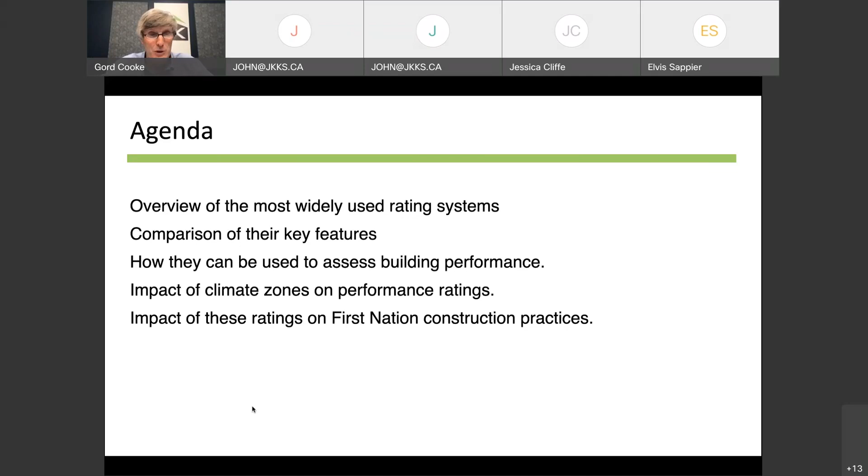For this particular talk, I was asked to speak about - and I'll give you the agenda over the next hour - an overview of the most widely used energy rating systems and energy modeling systems, a comparison of some of their key features, and then how they can be used to assess building performance. I thought I'd give you a sense of what they look like in different climate zones - some extremes, frankly, coast to coast to coast, and you'll see what that looks like. And lastly, throughout, think about what the impact would be on First Nations construction practices, I guess is where we'd start.

I showed this slide last week in terms of Passive House, but in Canada there are roughly these energy programs, at least on the residential side - it would be different for community buildings, schools, and so on. On the residential side, these are the various energy programs out there across the country. Some of them are province specific - the bottom right corner, for example, Novoclimat is a Quebec-based program. Built Green is primarily in Alberta and BC. The Energy Star program is available across Canada - it's a Natural Resources Canada program, but it's primarily been successful in Ontario and so on.

The one in the bottom middle, HERS Index - Home Energy Rating System - is actually a US program. It is delivered in Canada by one small provider, but generally speaking it's US-based. So those are the various energy programs. I thought I'd go back to the idea, and I know not all communities are using National Building Code, but just notionally understanding that in the National Building Code, from the energy perspective, which is Section 9.36 of the code, there are a number of compliance paths available.

You can meet performance requirements using what's called the prescriptive path. It's a series of tables by climate zones with some very limited choices and some ideas of trade-offs.

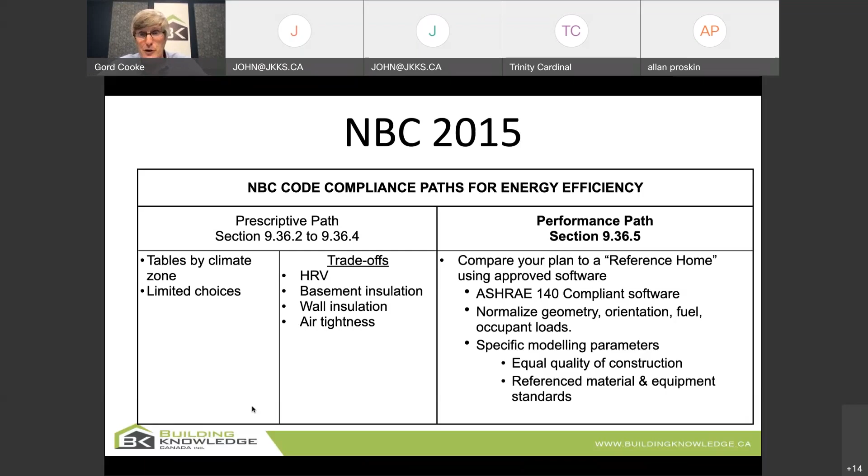Under performance path, you can dial in much better the energy performance of houses and get a better sense of where things are headed. Hopefully I can show you that as we go through this.

In order to do the energy modeling, you have to use a compliant software. There's a test that's done on the software, and right now there are three software packages available for energy modeling. One is HOT 2000, which is a Canadian government software.

Another is Energy Plus, which comes out of the United States historically, and then the Passive House program, which comes out of Germany. So there are three compliant softwares. You can use any one of those to model your buildings. Energy Plus is actually used on the commercial side as well, but you would model the house using that compliant software.

I'll go a little bit further. In terms of energy modeling software, they all give very similar comparative results. They use essentially the same basic algorithms but apply them in different ways, and those algorithms are what's critical. There are three categories of software.

First, on the left-hand side is HOT 2000, developed back in 1982 or earlier. It's owned and directed by the Canadian government. It's free. You have to be licensed in most locations, but not necessarily, as long as you have credibility. To learn the software is probably three days of reasonably good training to understand what it's about. You can fiddle with it on your own, but you'd probably want to take a training program.

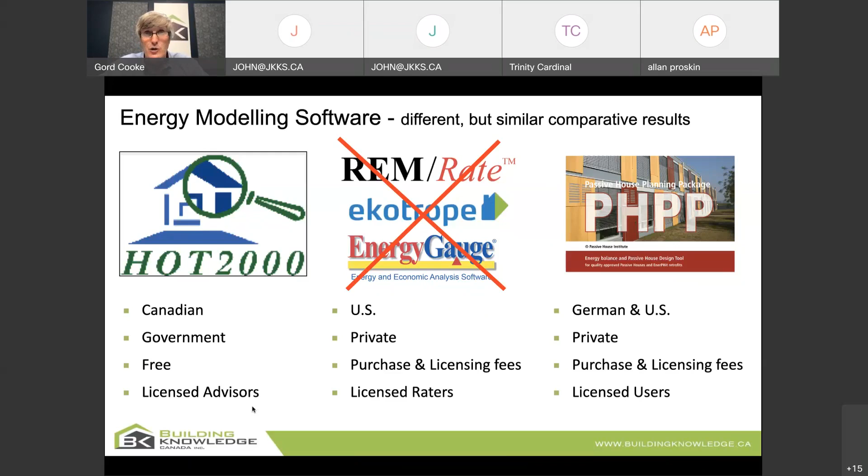So I'd encourage you all to get a familiarity, or get a relationship with, an energy advisor. There's about 700 licensed across the country. If you'd like to become one, they're encouraging that, and there will be training available shortly. At the very least, there's an association called CACEA, Canadian Association of Consulting Energy Advisors - I happen to be a member - if you're interested in learning more and getting training to be an energy advisor. So either become one or have a relationship with one so you can start to make use of these tools called energy modeling software.

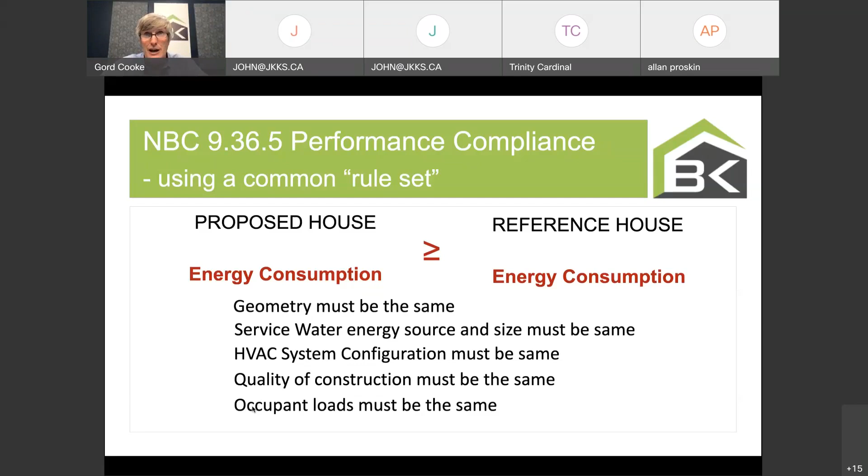There we have it. In terms of the comparative mode of National Building Code, I just thought I'd give you a sense. With the reference house and the proposed house, you basically take a house with the same geometry, the same service water heating source and size, the same HVAC configuration, similar quality of construction other than amounts of insulation, and you assume the same occupant loads. If there's going to be 6 people in your proposed house, there'd be 6 people in the reference house. You do an energy model, and as long as you can show your energy consumption is less than the reference house, then you're good to go.

The reference house is insulated to what's called the prescriptive levels of the code, the windows as per the prescriptive levels, the HVAC system as prescriptive, and then you insulate the way you want to, do windows to your specs and so on. It's worth a look because the style of housing you're building typically will model quite nicely under the comparative path or the performance path. So we always recommend all of our builders use the performance path because by nature, the prescriptive path is ultra conservative.

You're going to ask, how much does it cost to get a house modeled? If you send us a set of plans, if it's a one-off, we look at the size of the house and the complexity of the house, and it's typically $250 to $500 per house. Now, if you're building the same house time and time again, you don't have to model them every time - you model them once. And if you send in a whole whack of plans and say, I want you to do 20, and they're all very similar, then the cost will go down.

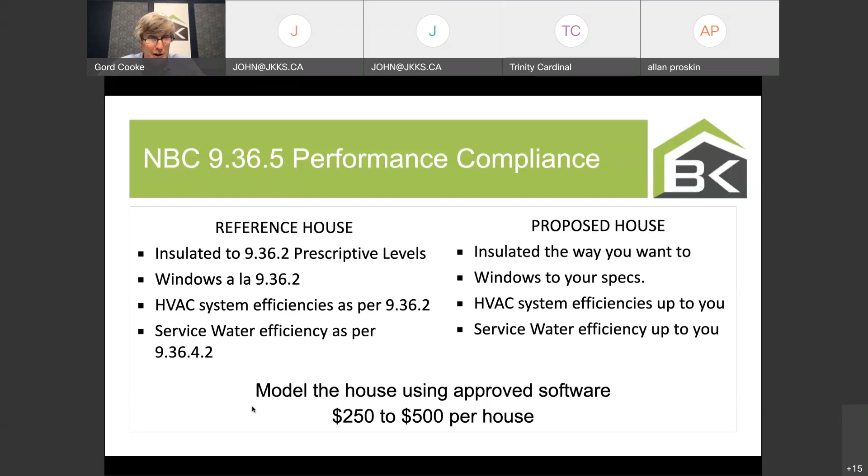But to have an energy model done on a set of plans, it's 3 to 4 hours of work, I would say, for somebody to do. Plus there's liability associated with it, reports to write and so on. So they're typically charging in that $250 to $500 range. And then I would say to you, that's energy modeling software. Now we get to rating systems.

If you wanted to compare one house versus the next, your house versus a house built last year, or your house versus the house being built across the street, there are two common rating systems. The first, on the left, is the EnerGuide rating system, developed in 2003 by the federal government for houses. You've all seen EnerGuide ratings on appliances, and now there's an EnerGuide rating for houses. On the right is the energy HERS index used in the United States. It's the most commonly used energy rating program in the US. There are others, but this one's commonly used. It's an index, and let me show you the differences as we go through this.

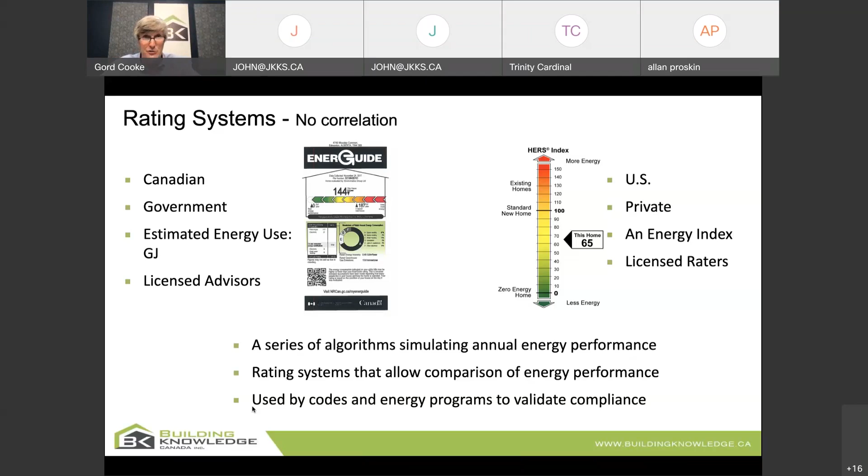Both of these use very similar algorithms that simulate energy performance, and they have rating systems that allow comparison of energy performance. On the left, EnerGuide, the lower the number, the better. It's actually in gigajoules, telling you the number of gigajoules of energy your house is predicted to use. The one on the right is an index. Again, the lower the number the better, but it doesn't tell you actual energy use. It tells you a comparative index of how well your house is doing. Both rating systems are recognized by code. This software rating system is recognized in the National Building Code of Canada. The HERS index is recognized in the International Energy Codes in the United States.

I thought I'd start with the HERS rating, just so we have a sense. As I said, simulation software creates a rating, and there are lots of software programs out there. This package is recognized in the Ontario Building Code, so it could be used, though not yet compliant with the National Building Code. Builders offer upgrades that improve performance. The rating system includes blower door testing, duct leakage testing, and drywall inspection. In Canada, there's an organization delivering the rating system. They're centered in Toronto, a fairly narrow scope I'd say for a great company, but they don't travel across the country. They would be happy to talk to somebody if they want to do it.

The key to the HERS index is understanding this: it's an index, comparing a house to itself. The scale is based on 0 meaning zero purchased energy, and 100 meaning a house built to the 2006 International Energy Conservation Code of the US. This means a 10,000 square foot house could achieve a HERS score of 65, and a 1,000 square foot house could also achieve a HERS score of 65. It's an index, basically saying that 10,000 square foot house at HERS 65 is 35% better than the same house built in 2006. It's showing you, relatively speaking, how well you did. If you took a house at 65 down to 35, you'd say you cut the energy use of that house in half. It's an index, so it doesn't tell you actual energy use. Hopefully that's clear enough.

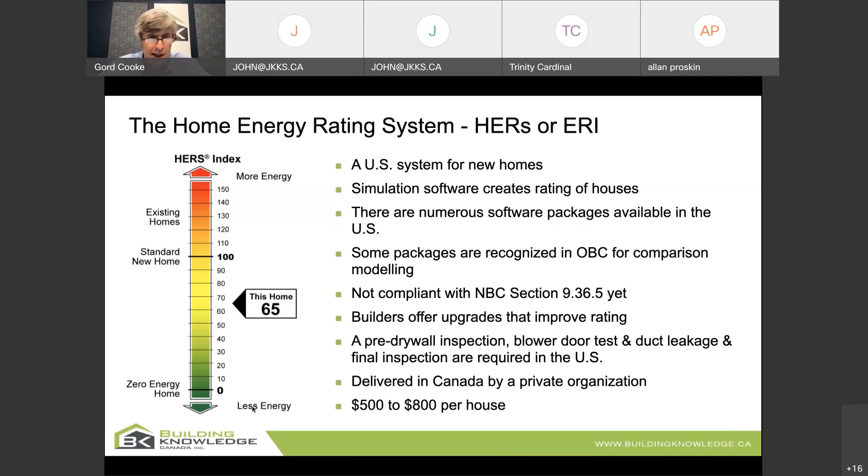They find it useful in the US because they don't want big houses necessarily compared to small houses. They like that everybody can show, hey, in a 10,000 square foot house, I made some nice gains, cut my energy use in half, even though I know I still use way more energy than a smaller house. But that's the way that system works.

The cost to run this is in the $400 to $800 range, a lot of that having to do with site visits. In northern communities, what's the capacity? Clearly somebody from my market isn't necessarily going to travel up to northern Ontario. So the cost really comes down to whether there's somebody local who can do that blower door testing. Let's imagine the energy model only costs $250.

To get an actual rating is $400 to $800. A simulated model can be done from anywhere - I can do a set of plans for China, for heaven's sakes, from my office. But to actually do a rating, I have to go to the house and test and make sure that things were done correctly.

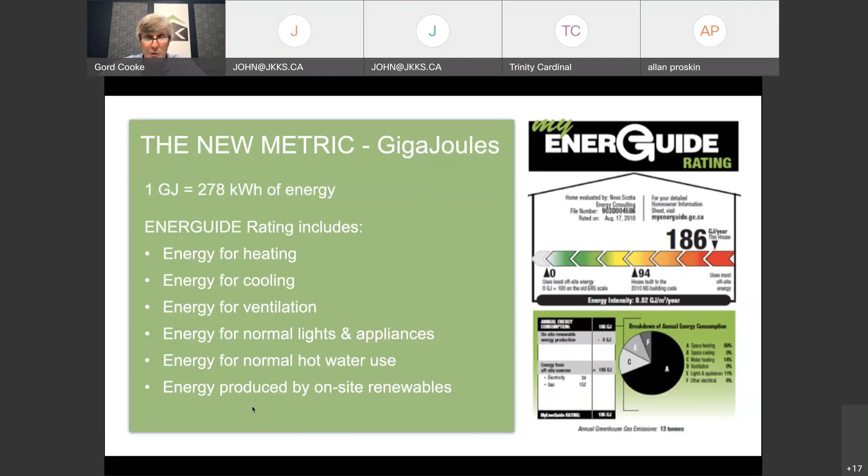In the software, you can change and model based on higher or lower occupancy. But when you're doing the rating, you always assume what are called default base loads. So I'll give you a sense of what that is.

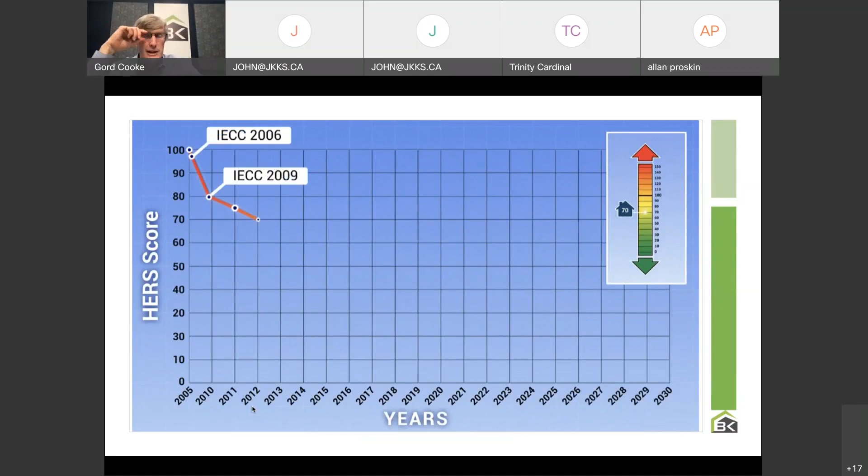I thought I'd go back to the HERS score - there's a little animation that plays here. This is the US HERS rating, benchmarked at 2006 code. The US program is trying to drive everybody to zero energy by 2030, and basically their codes have shown a nice progression of roughly 15% improvement every 3 years in the International Energy Conservation Code.

In the HERS index, by the time you get to roughly HERS 40 to 45, that's what we would call zero energy ready. That is, no amount of insulation, no matter how many panes of glass you've got - by the time you get to HERS 40, the only thing left to do is either take shorter showers, turn off the TV, or generate with electricity. So on the HERS index, HERS 40 is about as low as you can go.

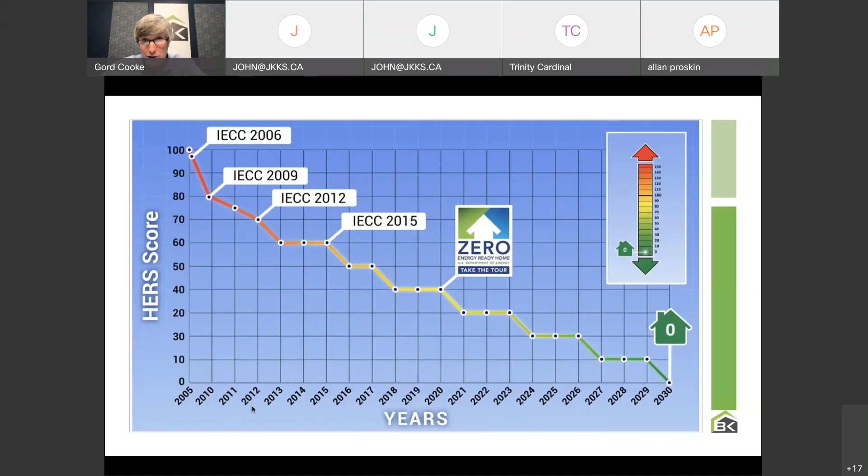I'm lying a little bit - I built a house that got down to HERS 31 without putting on solar, because I put in extreme amounts of insulation. But from a practicality standpoint, by the time you get to HERS 40, you're really stuck, and you end up putting solar panels on the house to get it down to zero. Why? Because the HERS index includes lights, appliances, hot water, in which case it's hard to make those more efficient.

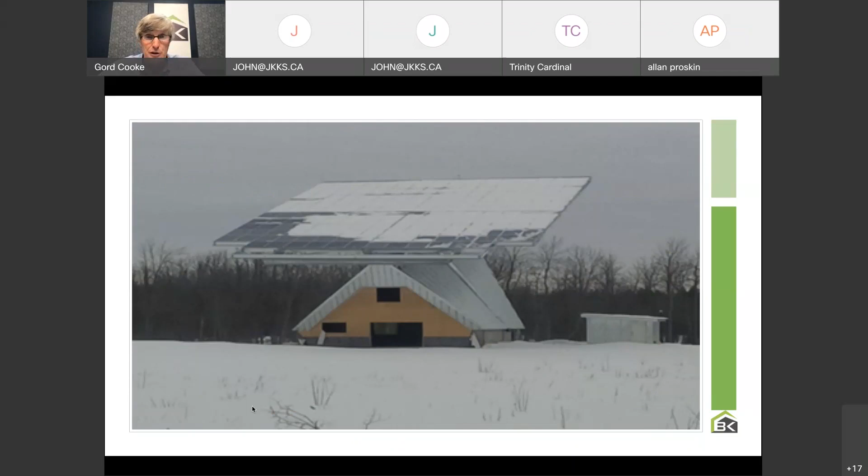So I just want to give you a sense of that - we always joke that that's what a zero energy house looks like. That's, of course, not what we'd like to see you build. We'd like to see you build better enclosures, especially in northern climates, because obviously we're not generating much electricity here when it's full of snow and dark. But I thought I'd give you a little sense of how an energy model is done.

So there's a set of plans for a house - this is actually an RTM, so you'll notice the dimensions so that it's easier to move. When you do an energy model, an energy advisor like myself simply takes the sets of plans and clicks through the computer to get the ceiling areas, the wall areas, the window areas, the foundation areas.

We put in the insulation levels, we put in the mechanical specs. And you can imagine on a computer, I'm entering this - I'll show you what the screens look like in a second. It takes about an hour, hour and a half to do the energy model for this kind of house, plus then there's some fiddling around in terms of reporting.

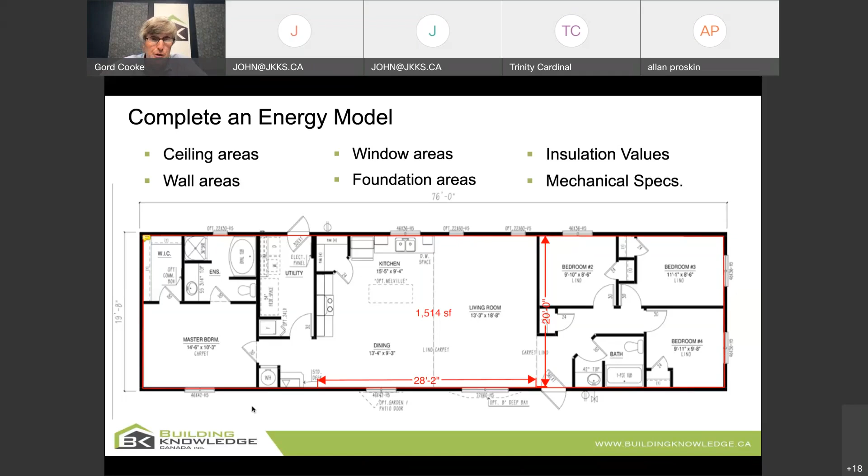That's why I said it's 2 to 3 hours worth of work to get that done. And we use the program called HOT2000, in this case, Hot 2000.

You'll notice on the left-hand side, you're basically building the house on the screen. You put in the ceiling levels, the wall areas, the crawl space, and so on. And you'll also notice a bunch of defaults.

What temperature is the house at? What's the base loads in terms of number of appliances? Is there any generation? Then you put in things like what you're expecting the air tightness to be, what ventilation system you use, what heating cooling system you're using, what hot water, and so on.

On the right-hand side, there's a whole bunch of screens that allow you to choose where you're located, what weather file you want to use, what fuel you want to use, whether you're in imperial or metric, and so on. In this context, the most important is the climate zone.

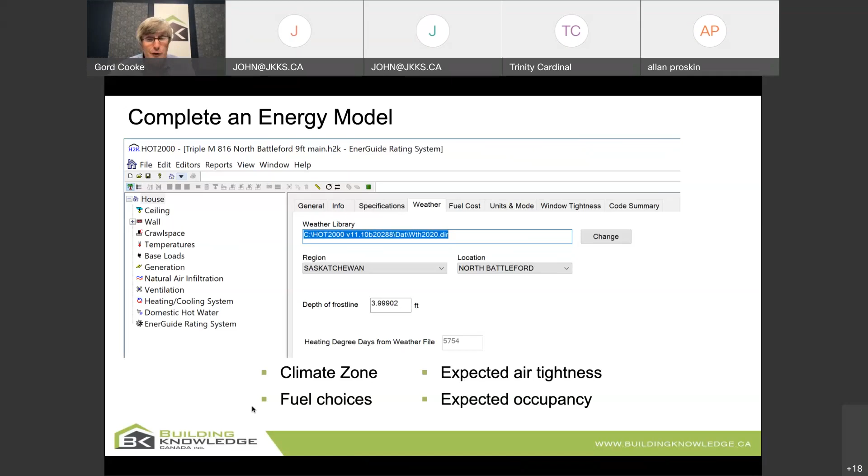Because obviously the climate has a big difference as to the performance of the house. But things like fuel choice, expected air tightness, expected occupancy, and so on - so you do that energy model for that house.

So that means there's tremendous flexibility depending on your community's preferred methods of build - lots of flexibility to model that. That's why I'm saying to you, performance path using these energy models, you'll find very useful.

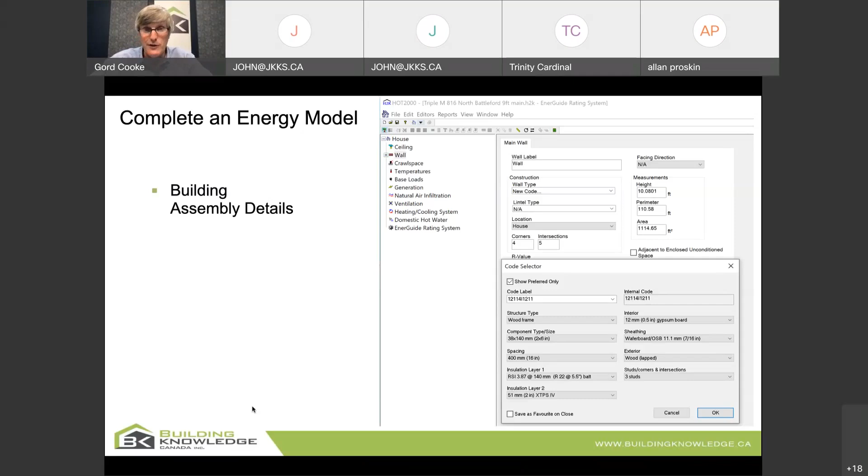Let's say you're using insulated concrete forms, or you're using SIP panels, or perhaps you're bringing in panels from somewhere else to erect, or perhaps you have a local source of an insulation product that you might want to use. You have the flexibility to enter that into this model.

So this is the energy model that's done. And then once you've done the energy model, it spits out a report. What we talk about doing is optimizing the options. This is our company, Building Knowledge, and we do this optimization report.

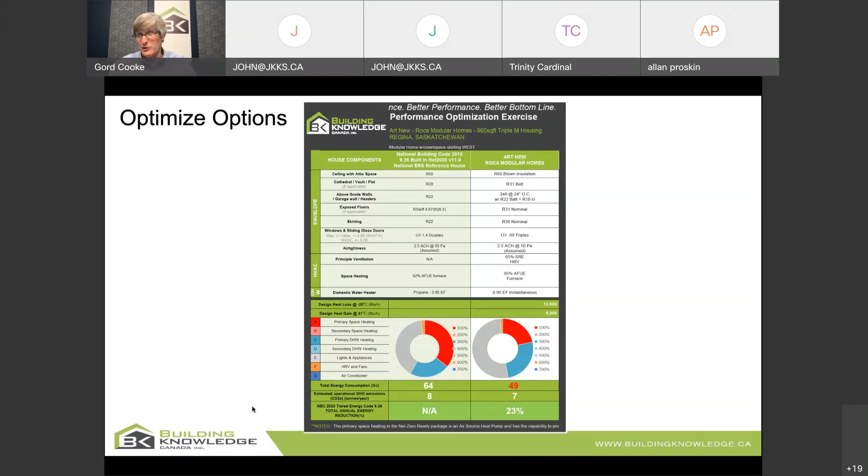In Hot 2000, you can put in the cost of fuel. If you're paying $1.50 a liter for propane, we can put that in. If you're paying 30 cents a kilowatt hour for diesel generated electricity, you can put that in for any number of places. That's exactly what this builder does—he's shipping it up to whatever community, he'll ask them their energy prices, and he'll ask us to put those energy prices into the energy model. Remember, it's not perfect. It may not match exactly what the energy use would be in that community, but it gives a comparative sense of the reduction in expected energy use.

So I took that house and modeled it for various locations. I went way out to the West Coast and picked Herbert Island, just off the northern tip of Vancouver Island. I also went to Battleford, Saskatchewan, Pond Inlet in Nunavut, Saugeen Shores where my cottage happens to be in Ontario, and Bathurst, New Brunswick, where my wife was from. I had a connection to each of those, so I thought I would put those in.

Remember, normal hot water use—we don't know how much energy people are going to use, so we assume 4 people showering and cleaning on a normal basis. It turns out that with this house the builder suggested, there's very little energy used in Herbert Island to heat the house, yet in Pond Inlet, still lots of energy is used. But you'll notice that in all cases except Nunavut, the hot water use is now bigger than the heating use. When you get to more and more efficient buildings, the impact of hot water is actually bigger than the impact of space heating loads.

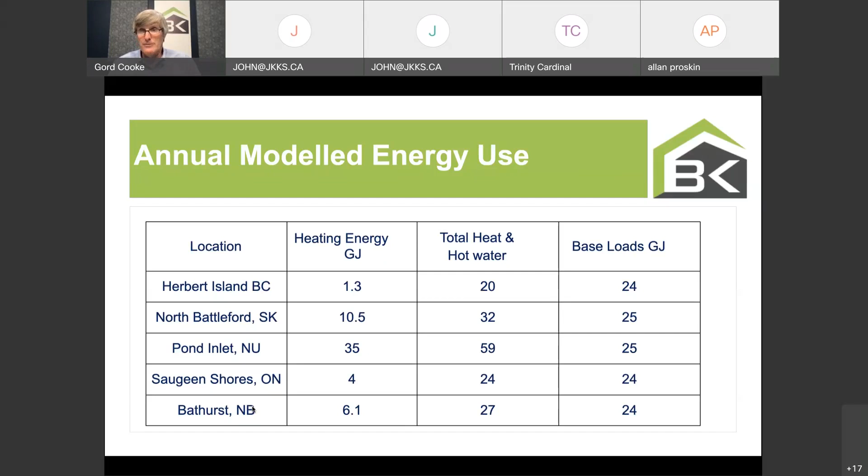So hopefully that's helping a little bit. Unless there are questions, I'll keep going.

These labeling programs would say, I want you to do the energy rating, and then I'm going to tell you what I want the number to be. So for example, in the R2000 program, you have to show half the amount of energy use as a standard code-built house. So if a code-built house is 100 gigajoules, you have to show up at 50 gigajoules. There's an actual pass-fail to these programs that you want to get to. The net zero program requires you to show that you are at 0 gigajoules in order to get there.

All of these programs have very specific registration and validation procedures. Every one of them includes at least one site visit to make sure that whatever was built met these requirements, tested performance. So the question always becomes, what's the value in these labels? I would say it's a quality assurance process - it gets you actual quality assurance. I have homeowners who would say to me, how do I know they're a good builder? Make them build Energy Star, make them build R2000. Therefore you know that somebody separate is coming to have a look at the energy performance of the building.

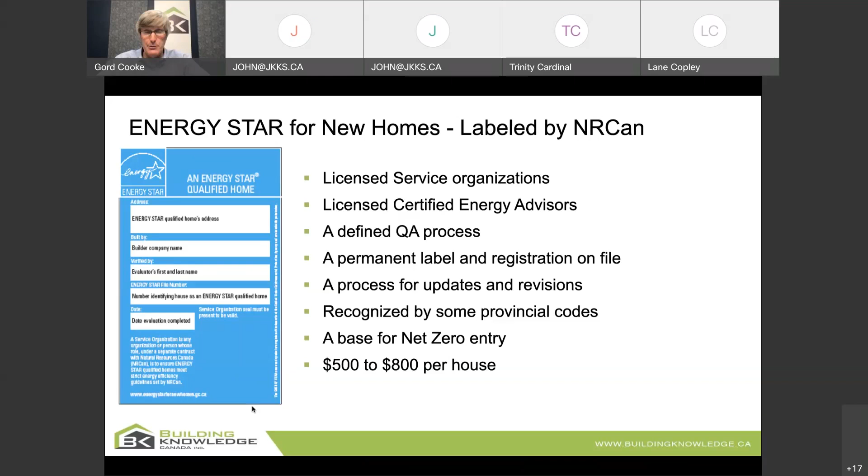Fairly simple, fairly straightforward. Here it is. You work through a licensed service organization, a licensed advisor like myself, very well-defined quality assurance process. You get this label, and typically the cost is $500 to $800 per house to have a label produced on a one-off situation. Again, if you're doing dozens of houses, the cost would come down. It's a pretty simple, useful label saying that I'm better than code by about 20%.

And then I mentioned the Zero Energy program last time, so I won't spend too much time on it. This is a program defined by Canadian Home Builders Association, and its goal is to make houses zero energy, get houses to the point where they're going to use, on average, over the course of the year, 0 gigajoules. So on a zero energy house, you're putting solar panels on the roof, understanding that in Nunavut I don't get a lot of solar in the winter, but I get a whole bunch in the summer. As long as what I make in the summer makes up for what I used in the winter, that would be called a zero energy home. That's a pretty straightforward program.

The Net Zero Ready is everything but the solar panels. So you could build a house as good as you can, and then someday later put on the solar panels. When you do, you'd be achieving a zero energy home. The base requirements: you use Hot 2000 to simulate the energy use, you have to be at least 33% better than code on the enclosure itself, you've got to meet an air tightness level of 1.5 or less, and then a very comprehensive quality control.

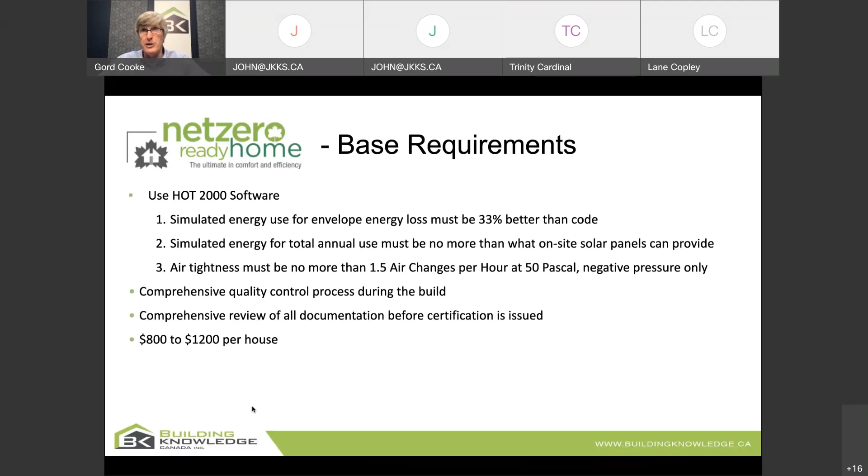It's about $800 to $1,200 per house, notwithstanding travel cost. But typically in Southern Ontario, if somebody's doing a net zero house, we were charging $800 to $1,200 per house to do the verification, certification, labeling, testing, and so on. So you get a sense of that.

I thought I'd spend, unless there's any questions, the last 15 minutes on giving you examples of what moves the bar - that is, what makes that number of gigajoules go down in Pond Inlet or in Herbert Island. Let's figure that out, and it's all based on science.

This is the value of the energy model. If you saw this energy model and you saw that only 5% of the energy goes to heat loss through the attics, but 30% goes to air leakage, you would say, well, I'm not going to spend any more time insulating the attic. Why would I go to R70? Doesn't make any sense. Why wouldn't I make my house tighter?

And this is, to my mind, really important for First Nations communities to understand: the single biggest bang for buck in your houses would be to make them tighter, old or new, to make them tighter. So better air tightness, better foundations, better walls, better windows.

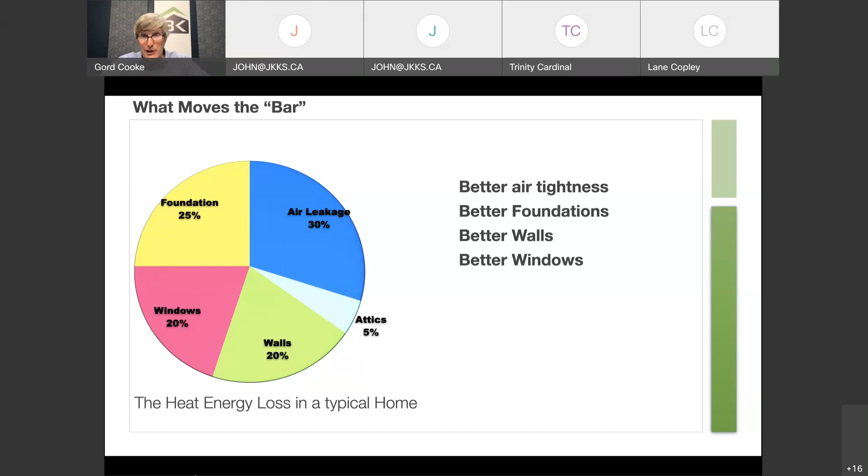I thought I'll give you an example. In order to get to net zero, what you want to think about is doing a better enclosure and better mechanicals, and then adding solar panels. For your interest, almost everywhere in Canada - except St. John's, Newfoundland, because it's foggy all the time - one solar panel generates over the course of the year about 1 gigajoule of energy.

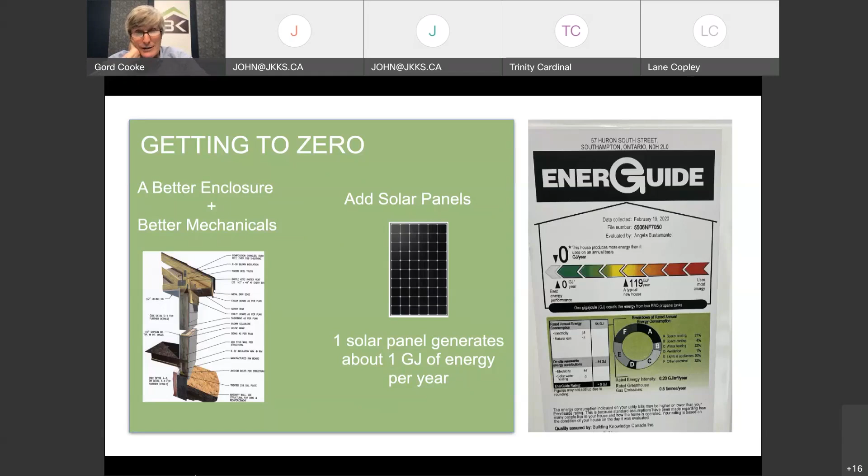Even in Pond Inlet, I haven't checked its particular climate, but because you have 24 hours of daylight in the summer and none in the winter, over the course of the year you'd still generate roughly a gigajoule, because you have lots of clear skies. This number holds up in many locations in Canada, though it varies a little. Obviously in northern climates, you're generating it all in summer and trying to recoup it in winter. So what do you do? Store it? There's no way to store that amount of electricity in batteries. You'd have to use some other mechanism, or use the grid as your storage system.

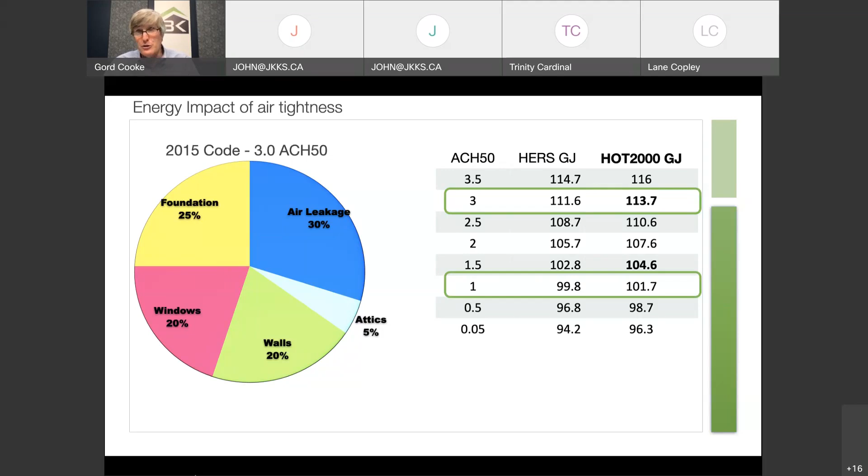I wanted to give you a sense in terms of air tightness. If you go from 3 air changes per hour, which is the assumed code, down to 1 air change per hour, whether using HERS software or HOT 2000, the HERS gives a slightly different score than HOT 2000, but comparatively they give roughly the same change, about 11 to 12 gigajoules. Just getting a house from 3 down to 1 saves you 11 gigajoules. And 1 gigajoule equals 1 solar panel.

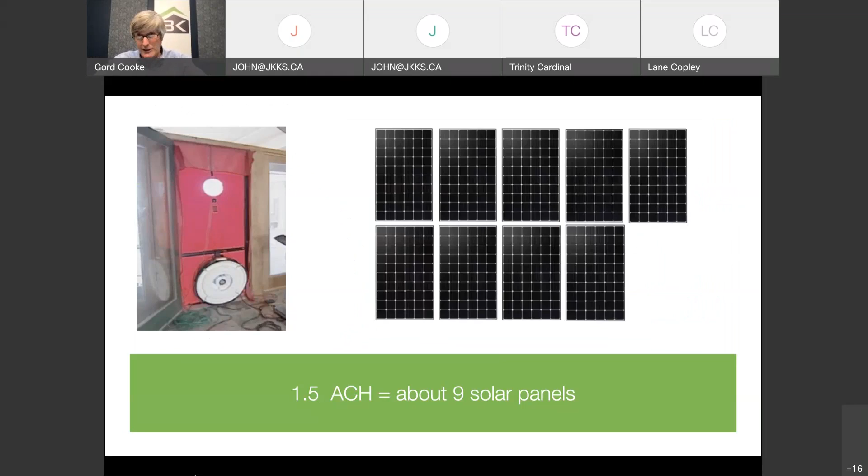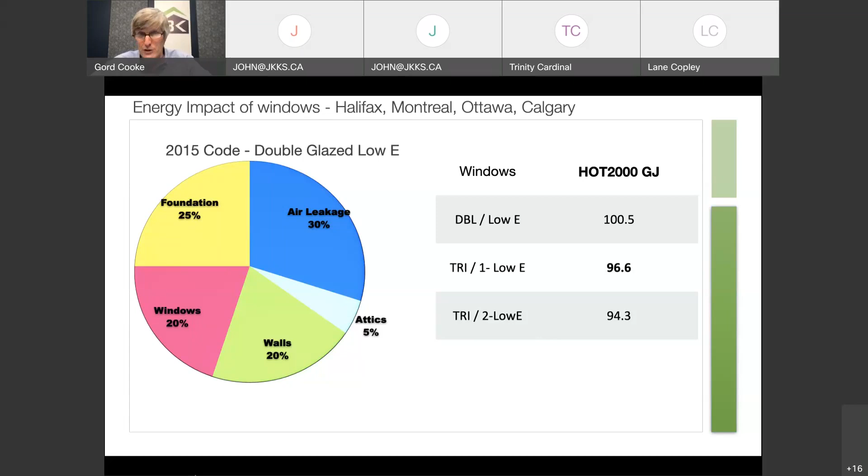Now you're going to say, if I've already got that fixed, what do I do next? Let's look at windows. This is for the middle of the country, Halifax, Montreal, Ottawa, Calgary. If you take standard code compliant double glazed low E glass and go to triples, even one layer of low E, you're saving roughly 4 to 6 gigajoules. So triple glazed windows in the center of the country save you 4 to 6. Clearly in Pond Inlet triple glazed windows save you more, a bigger bang for buck in far northern climates. But basically triples are somewhere between 4 and 6 solar panels.

So, got to do my air tightness, got to get the windows done, what do we do next? If I add 2 inches of insulated sheathing to the outside of a house, again middle of the country, that's another 5 to 6 gigajoules. Why do windows first before the wall? It depends. If you have a 2-story house in Southern Ontario with 25 windows, doing the windows could be pretty expensive. But in your houses, with a modest number of windows, single story for the most part, adding triple glazed windows is one phone call to one supplier. Adding foam or insulated sheathing to the outside means changing wall dimensions, which may change foundation dimensions, and changing window build outs. Wall insulation is typically more expensive or more difficult to do than a window change.

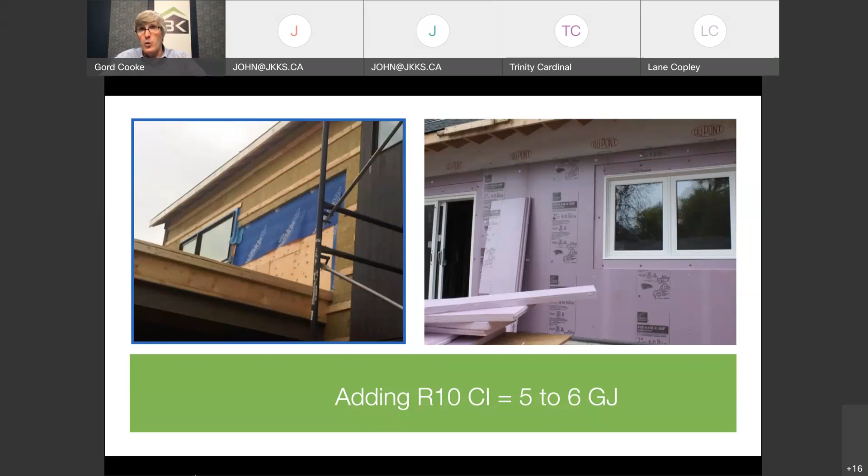So this is what we think about: how easy is it to do? Air tightness is relatively inexpensive, some caulk, some tape, some foam, though you do have to test the house with a blower door. Windows are one phone call, so that's really easy to do. Windows also have the added benefit in northern communities of reducing condensation because the windows are warmer. So if you have high occupancy rates, you like triple glazed windows just for their condensation resistance and less mold more than almost anything else. Air tightness, windows, walls are all the kinds of decisions you start thinking about making.

And then ultimately, especially in communities where you definitely want to get to net zero, and especially if you're using solar, you're going to get heat pumps. Many of your communities will need cold climate heat pumps far north, but nonetheless heat pumps, because of their efficiency. An electric space heater is 100% efficient. A heat pump is 300% efficient. For every dollar of electricity you buy, you get $3 worth of heat. Now in northern communities, you're going to ask, do I have access to refrigeration mechanics?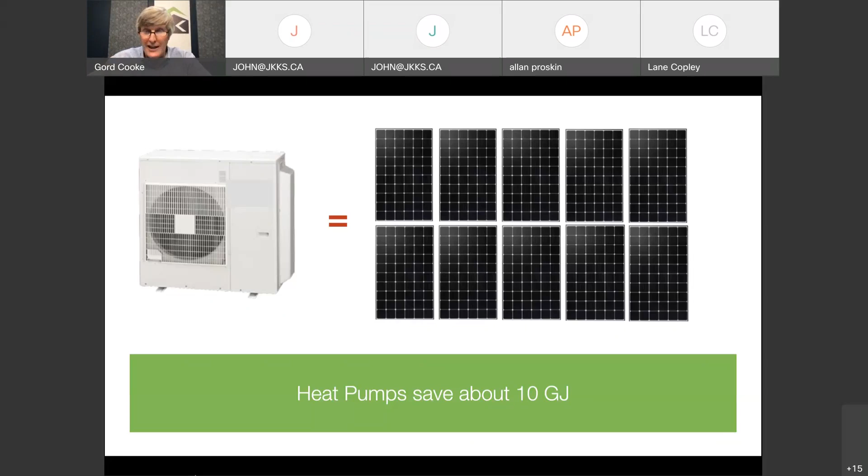Why didn't you do it first? Here's why: you don't want to oversize the heat pump. You'd first like to do your air tightness, then windows, then walls. Now the heat pump gets smaller. If I don't do the windows and air tightness first, I end up needing a 5-ton heat pump. Whereas if I've done the windows, walls, and air tightness, now I'll maybe only need a 2-ton heat pump. So you always want to do the enclosure elements first, then come back and do the heat pump. But it's really hard to deny the use of a heat pump.

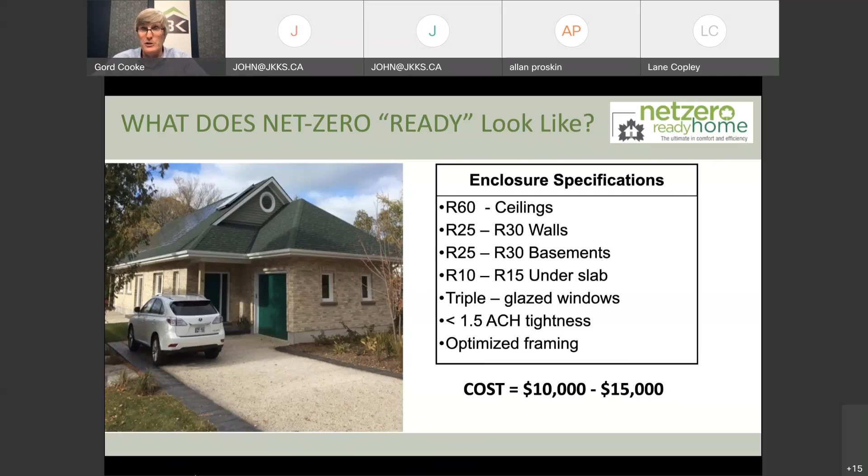I showed you this slide before, but in an Ontario context, that is Saugeen Shores: R60 in the ceiling, R30 walls, R30 basements, R10 to R15 under the slab, and the cost is in that $10,000 to $15,000 range. Of course, you guys have to make the decision at your community level. What's the price of fuel? What's the payback? All of those good conversations.

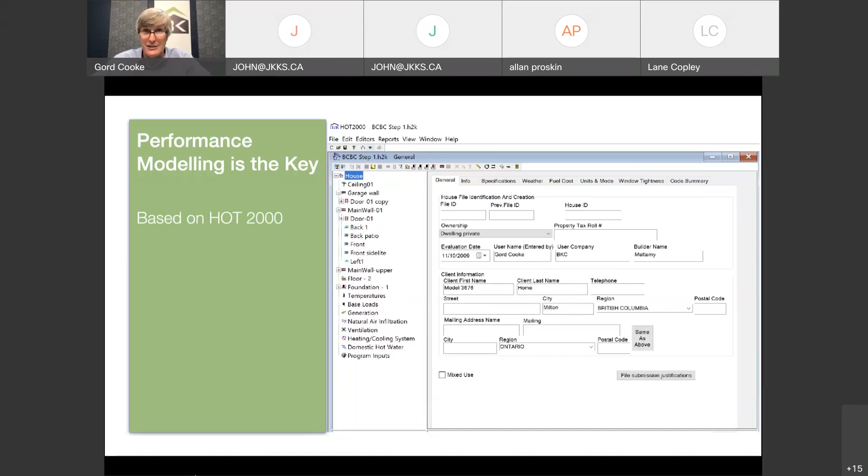Just to finish up, I'm advocating that you use performance modeling if you're building new houses or making assessments on what to do in old houses. I would say use HOT 2000 — it's the most common software. Use a registered energy advisor or become one yourself, I'd encourage you to do it. It's not that difficult. Obviously, you've got to choose knowledgeable trades and train your trades.

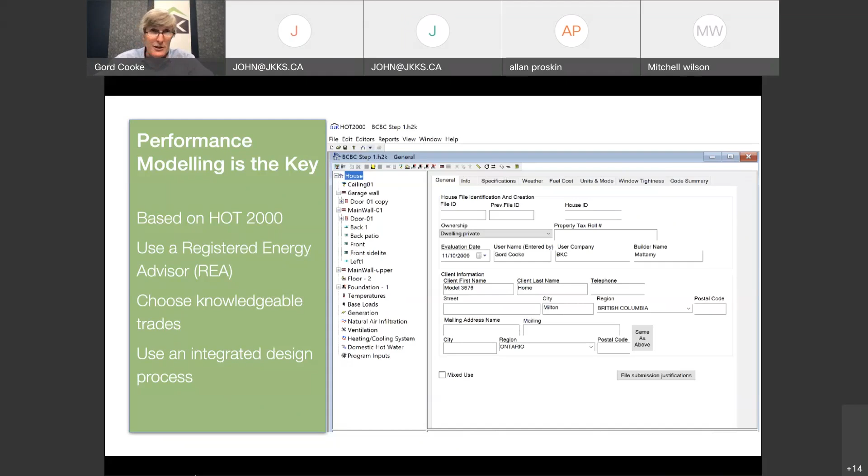And I would say this integrated design process — let us do the energy model, let us help you define the specs for the equipment you want to use, and figure out these process issues. What's easier, what's quicker? Triple glazed windows, foam on the walls — how do we get that done is where we'd like to get to.

So just to finish off, the most commonly used software in Canada is HOT 2000. It's free, you can download it now. To really learn how to use it, it's 2 to 3 days of training. The most popular program from an energy perspective has been Energy Star. It may not be applicable in remote communities, but it has been a very popular program. Habitat for Humanity uses it quite regularly.

The EnerGuide performance path makes sense for First Nations, and others can work too. Not to say that others can't work, but again, I'm making this pitch that the performance path is the way to go. And of course the goal is the same: we're driving down to zero energy and zero carbon. The same basic improvements work in all climate zones.

I guess in Herbert Island you probably don't need triple glazed windows, but everywhere else you want triples, you want air tightness, you want insulated sheathing on the walls. It becomes a question of how much. In Pond Inlet, you're going to want more than R10 on the outside of the wall — you're going to want R20 or R30, which is much more difficult to build, and we need different systems.

So it will vary by community, but the same basic concepts apply. Get your air tightness done — that can be done in Pond Inlet just as well as Herbert Island. Get that done, then think about windows, then walls, and so on. We're still pretty much at triples in northern climates. Quad pane windows are available and might be worthwhile in Pond Inlet, but they're not as available as triples.

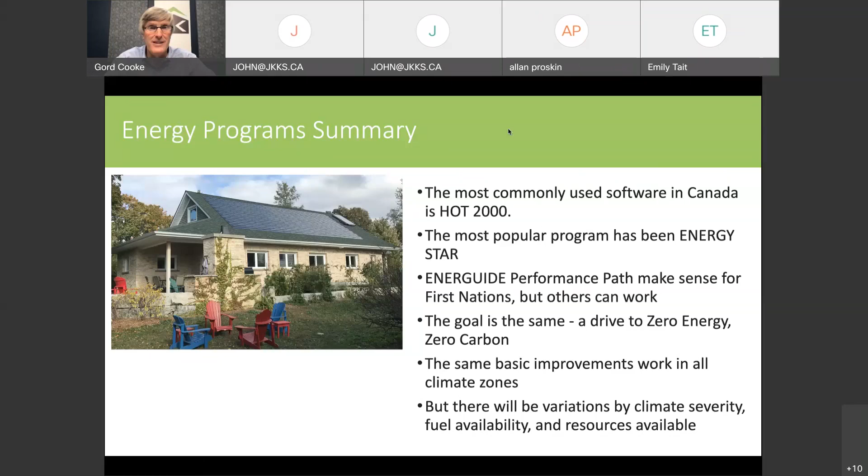Most utilities will accept back what you use. That is, they'll store it for you on a rolling average up to a year. It's called net metering. So you put it in during the summer, they'll hold on to it for the winter. But if you used more than you generated, then you pay for it. And if you generated more than you used, then you lose it - it just goes into the grid. That will change over time, but right now most are doing net metering.

And my neighbor did it, and I believe he figures 3-4 years he would recoup his cost. Yeah, I think that's reasonable.

I've had really good experience - I just saw Rudy say in BC they will buy it back. And that's fair. Some won't buy it back at the total value, they'll say, well, I'm not going to pay you top dollar for it, I'll pay you my base cost. But my opinion would be, I have solar on my house and my cottage, and I would say the return on investment was excellent. It was better than leaving my money in the bank, let's put it that way.

Yeah, all right. There's no other questions. Great.